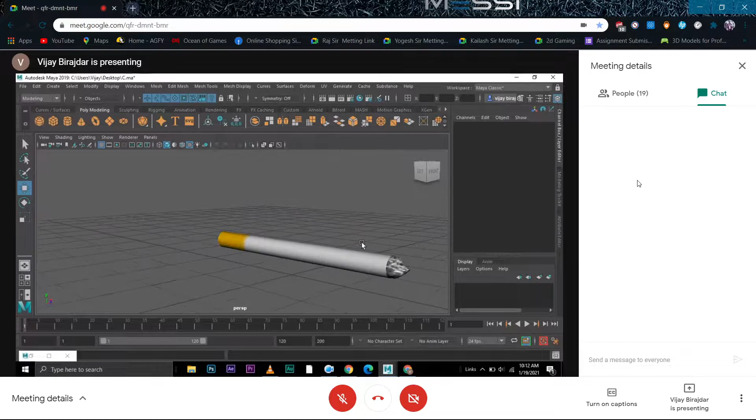In this, Vijay, the filter portion's proportion is looking a little bit too small. It could be a little more.

It's not showing in the viewport. Okay, just do one thing: click on the object and press 6.

Not happening. Vijay, I guess your screen is freezed. It can be my internet problem also, but I think your screen is freezed. Vijay, can you stop it and start once again presenting?

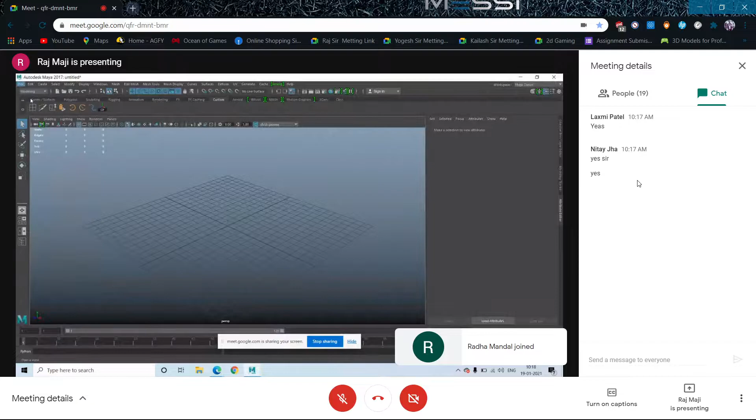First, you should practice unwrapping small models, and then a little bit more complicated models. If you practice so many models like that, you will have the confidence to unwrap anything. So let's open a random model to unwrap and check how to do it. Let's take the hammer we created. I want to unwrap this. So how to unwrap it?

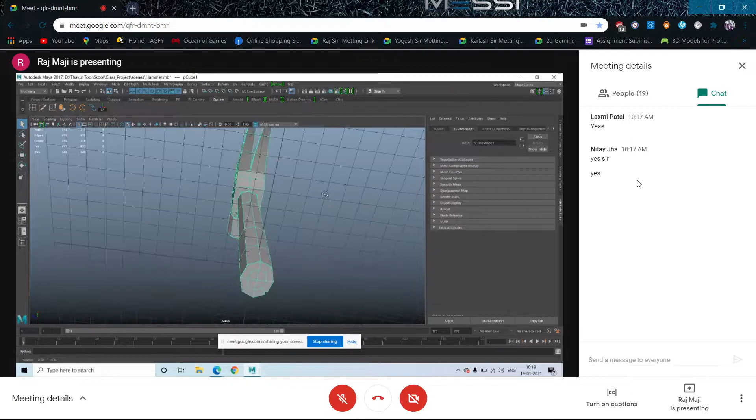Okay guys, so first of all, can anybody guess what to do? Can anybody guess what we can do to unwrap this hammer? What do you think? Any guess, come on guys. How to unwrap it? Any guess? Which mapping are we going to use? So what do you think, how to do it? Just analyze it. No one from the entire batch?

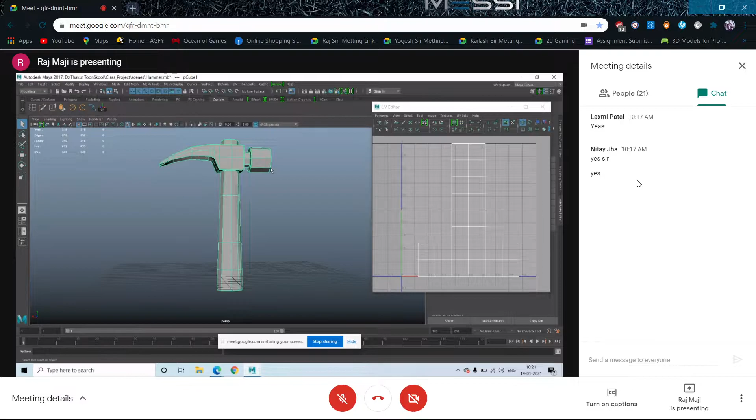Okay, so what I'm going to do at the very beginning is go to the UV editor. And then my intention is to keep the handle separately and keep the metal part separately. So how can we do that?

Basically, two or three different ways are there to do that. One thing we already know: let's select the last loop rather, polygons, and cut UV edge, right? Let's go to display, polygon, and texture border edges. So I have given a cut in that area, you can see.

Secondly, over here also, the last stage I can cut. So cut UV edge. Remember, I'm not cutting the model, I'm cutting only the UVs. So don't be confused in that.

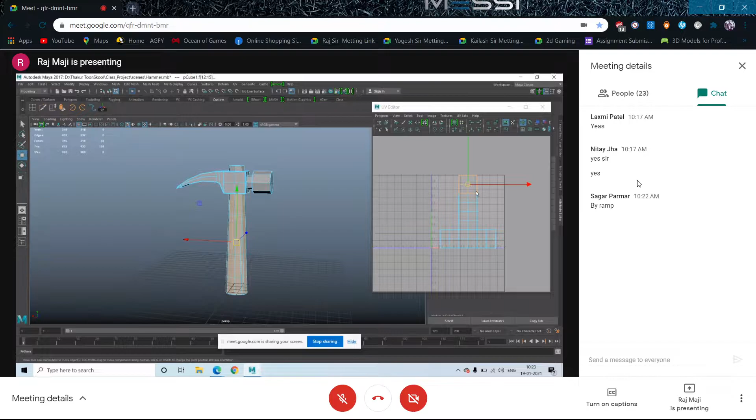Now let's check the UV shell. I'm going to select - so this is the entire bottom part. I think this is the easiest way to do this. And what can be the top part? So this is the top part. So the entire handle, we have separated the UVs. Tell me guys, did you understand this?

You understood this? What I have done, how to separate it, you got it? Yes.

So now, definitely, the rest of the part will be this part, isn't it? Now, in this also, I can see this is a cylinder, this is a cube. So these are all different objects. Modeling was very simple, but while doing the unwrapping, we need to think a lot for this. So what I'm doing, similarly, let's separate this cylinder.

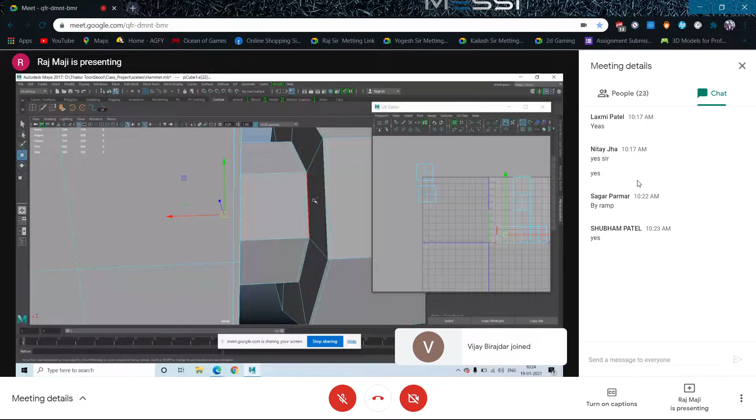Selecting both polygons, cut UV edge and UV shell. Let's keep this one separate. Now similarly, this is another cylinder, keeping it separate. So while dealing with a complicated object, you should deal like this: convert it into small pieces of primitives. Then there will be no problem.

And this is the rest, this is another part. Okay, so I have divided it like this. The handle, one cylinder over here I can see, another cylinder over here I can see, and the metal part. Now, one by one, let's do the unwrapping. First you have to analyze like this, one by one you need to analyze.

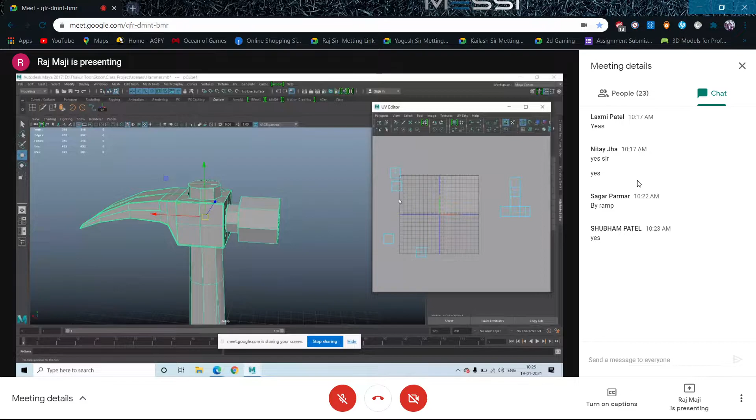So at the very beginning, let's select the handle. Just imagine you are having only this and you are going to unwrap this. So how are you going to do the unwrapping for this? Definitely this is a cylinder. So in a cylinder, what we have seen, the side we have to do cylindrical mapping, and the top and bottom we have to do planar mapping, isn't it? Can you remember that?

So for this, what I'm going to do: let's select the last stage, circular edge, and cut UV edge, selecting the UV shell and keep it out. Can you see? First I divided into primitives. Now, in that primitive, I am dividing into smaller shapes. How to do it? Over here also,

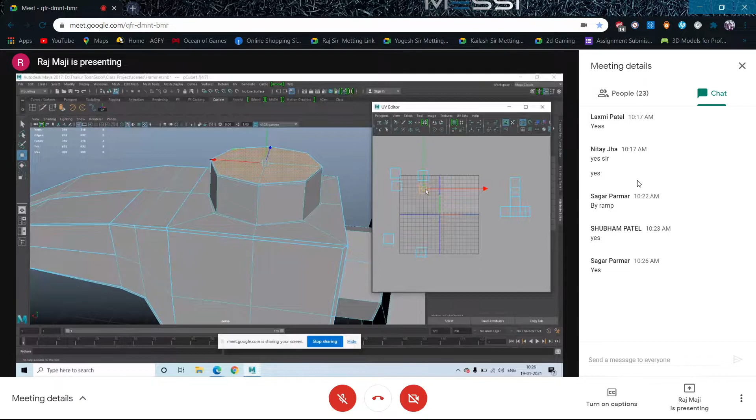selecting the loop, cut UV edge, and definitely this is also going to be another part of it. And now this portion is only the side faces, and you can see how much distorted it is, how much distortion has been. It has been converted into some lines. Can you see some lines? So this object cannot be some lines, so much distortion is there.

So all the faces are selected. This is all right. Now you guys will tell me what kind of mapping should I use for this. Tell me. Yes, cylindrical mapping, correct.

Keep this classroom very interactive. Okay, so I'm asking questions, you also ask me questions, and whatever question I'm asking, answer. Then it will be interesting for you also, for me also. Otherwise it's very boring.

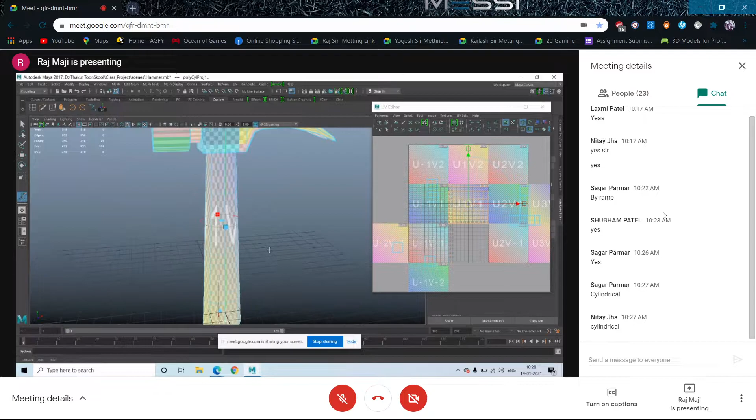Okay, so the side faces are selected. Now going to UV and cylindrical mapping. Now let's say it's better, much better, isn't it? So we have to do something, the scaling is still not correct, right?

So coming to this mapping, and you can see, if you can see properly, can you see this manipulator? Okay, through this you can scale it actually. So from the viewport also, last day I showed how to do it from the viewport, and from here also you can do it. So in this case, from here it will be easier for us.

Let us check which side it is happening. So I'm doing the opposite side. Okay, so I'm keeping it like this, but from this side let's make it a little bit smaller. Okay, so getting better checker boxes. So this UV alignment is fine to us. Okay, workable this is. Now what about these two?

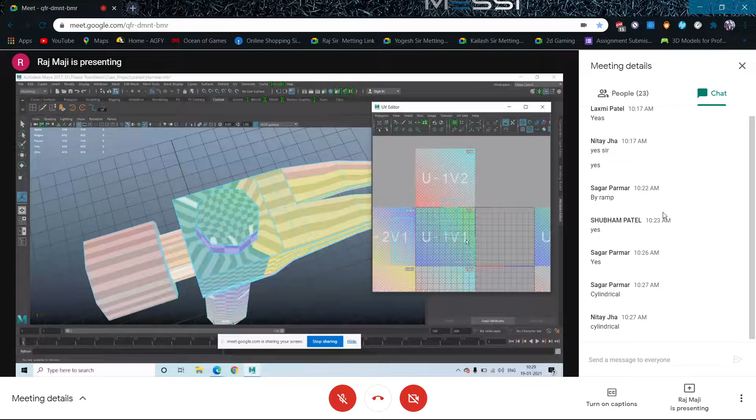You can see the distortion, right? So now selecting these two, the top and bottom. You people will tell me what kind of mapping should I use for this. Exactly, planar mapping, because those two are planes, right?

So going to UV, going to planar mapping, and the camera projection is selected. Now this time I'm going to the top view because I'm going to project from the top, right? And project. So now let's check. Approximately fine, isn't it? I think a little.

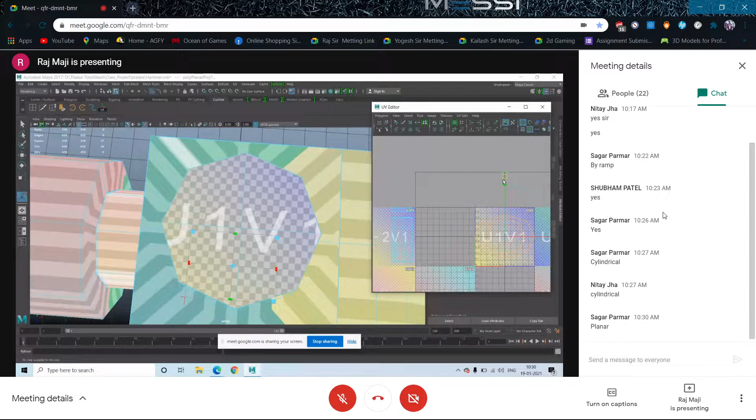It is fine. Now what about this one? This is also looking fine. Only the problem is in scaling. So let us check the scaling.

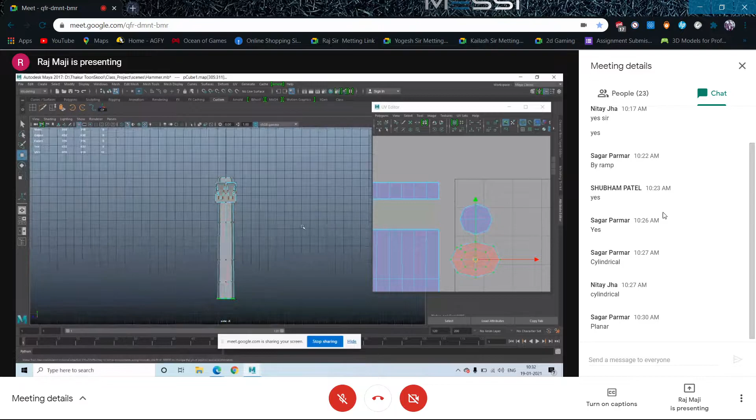Yes, that will matter definitely. So for this plane and this plane, try to understand which side it is facing. It is facing towards the top, no? This particular plane. So if I project this plane from the side or front, I will get a line. But if I project it from the top, I can get a circle.

I guess now you are getting the point, right? Yes. But you know, for the bottom plane, I projected from the top, so definitely it is inverted. So for this, what should I do? I should flip it, isn't it? This is becoming red, meaning it is flipped. So I'll just flip it.

And while flipping, remember one thing: don't select the edges and flip it, then all the faces will be separated. So always select UVs and then flip it.

Okay, so now this handle is perfect, the UVs are perfect. No need to connect anywhere, but if you want to connect, you can. I can show you how to connect, if you want to keep the UVs together that also can be done. So just select any one of it, only one, and move to see.

Only one, not more than one, remember, otherwise distortion will come. And for the top also, the same thing: any one, move and see. Like this, it can be connected.

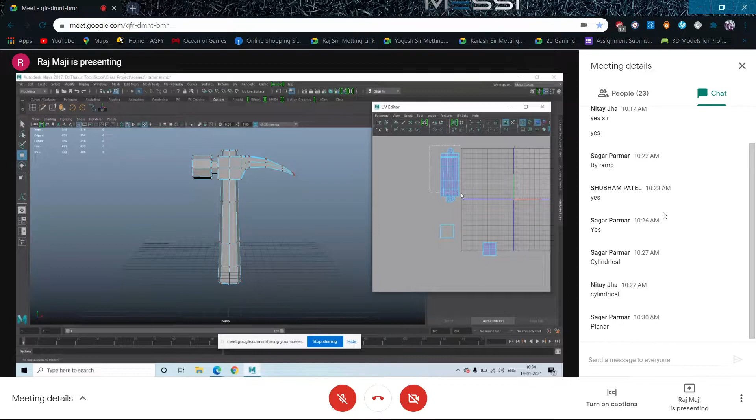If you reduce the number of UV shells, so this is entirely the handle, and you can see it is done very nicely, and there is no problem, no distortion, nothing. It's absolutely fine.

Okay, now let's come to this particular area, let's check.

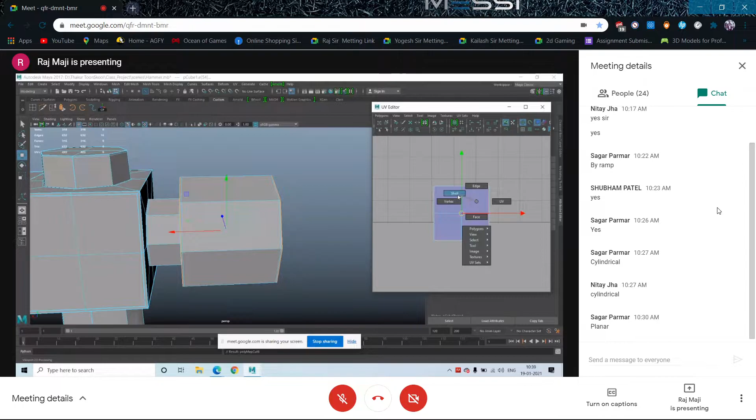So let's go to polygon and cut UV edge. Select the UV shell and keep it aside. You can see I'm keeping it aside, and select this UV shell also and let's keep it aside. And this UV shell is actually the cylinder. Now here guys need to learn something.

Guys, you understood the mismatch? All of you guys understood the mismatch? The orientation of the object and the orientation of the projection is different. You understood it or not?

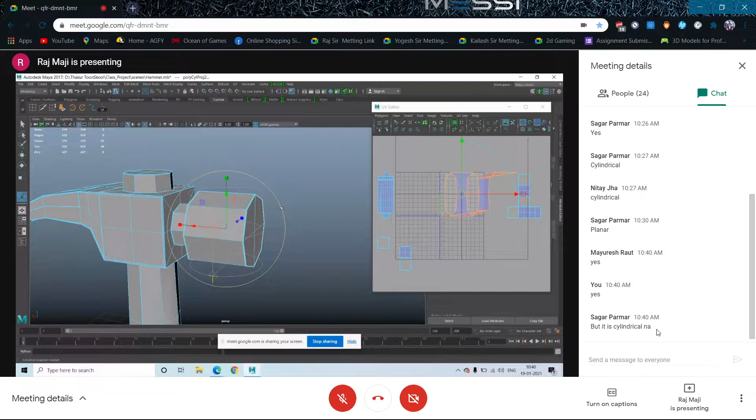Right, yes, so I also should rotate our projection. So what I'm going to do, can you see a small plus mark over here? I'm just clicking on it and I will get the manipulator of the rotation. So this rotation has to be 90 degrees. So you can rotate it approximately, or over here, just check where it is changing. Over here, it should be 90.

And you can see you are getting a perfect square shape, sorry, rectangular shape. Now over here, definitely the scaling is not correct. So orientation is correct now, but scaling is not correct. So what I'm going to do...

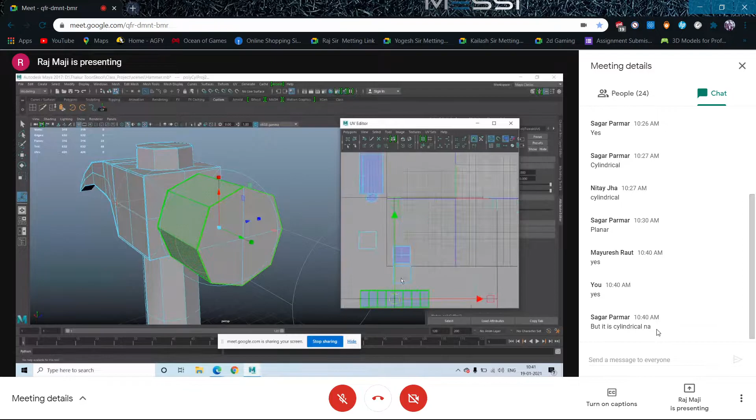In this case also, by selecting these two, how I did it last time, that could be done. But this time I am using this manipulator. Now it is all right. Okay, so this is done, and I'll just keep it aside. And I think these two are bottom planes, right?

These two, okay. Now in this case, let's go to the side view. Why side view? Because my planes are of this side. Okay, so go to UV and once again the same thing, planar projection. Sorry, planar projection, you can see I have done it.

Click over here and okay, this is done. Only one thing, I'm selecting the UVs and let's scale it properly. So definitely if I reduce it over there, the scaling will come correct. Okay, and I'm keeping it over here.

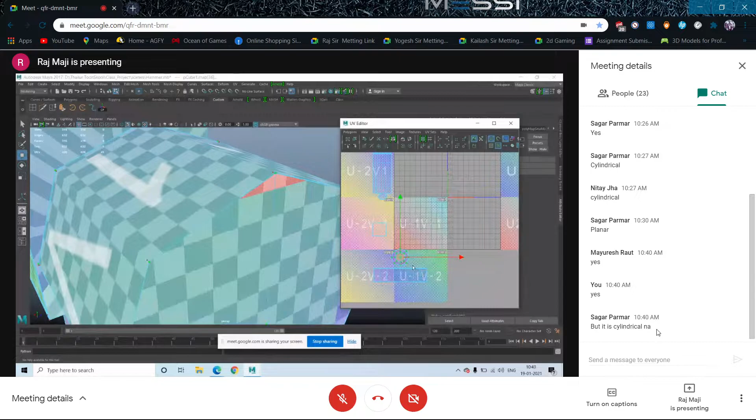All right, now in this case also, two planes are there definitely. So going to the UV shell, select one, put aside, and this one because I projected from this side in this case, right? So this one basically you can see it is flipped. So what should I do? I'm selecting the UVs of the entire UV shell and flip. This is also done. Okay, so the entire part is also done.

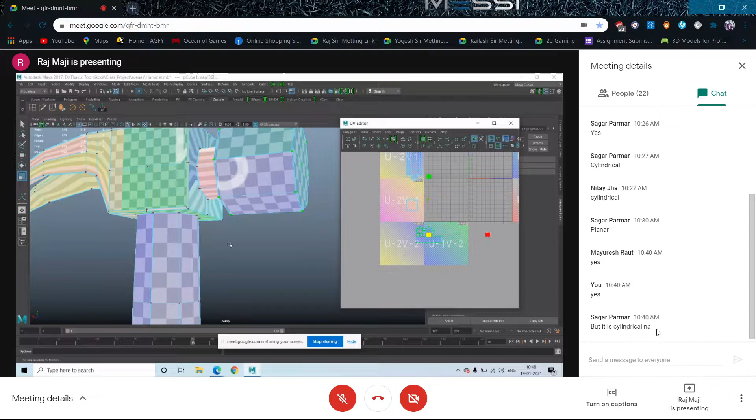Yes, yes, in 2019, in layout, if you are doing it, it will automatically come. But once again, just to remind you, most of the things at the very beginning, when you are a student, definitely you are going to use layout. But before that, try to match it manually. It is a good practice. Understood? So how I am matching manually, try to match it before using the layout. In 2019, yes, automatically it will be done. But in some cases, in my experience, the layout is not a 100% perfect tool.

Okay, so I have seen so many cases. Recently, I was modeling something and I was unwrapping also the same object, and it didn't work. Layout didn't work. Most of the cases, 90% cases, it worked. But this particular case, it didn't work. So I needed to work manually. That is the reason I'm telling.

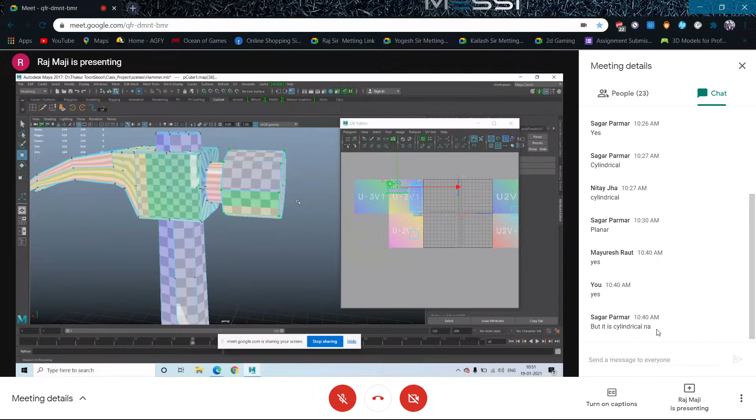So, selecting the face - now this side, this one, this is also a cylinder, right? So once again, going to UV and cylindrical mapping, and you can see here also this is looking problematic, right? The same problem - our cylinder orientation is like this, and the UV projection is like this. So what should I do? Just selecting this, and I need to rotate it, and it's becoming clean. So let's make it 90 degrees, and it is fine now.

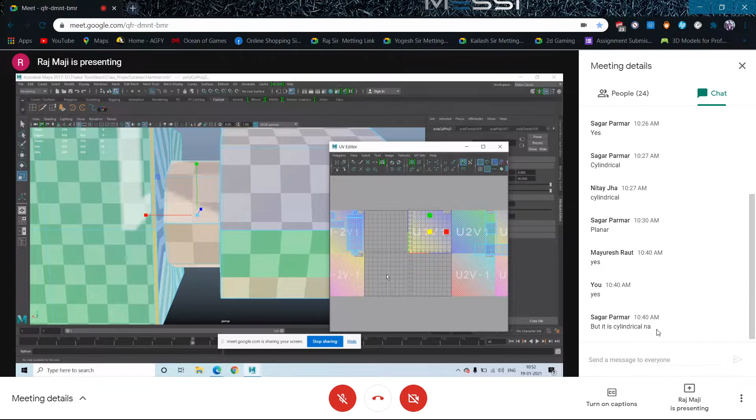Okay, now it is looking fine, but checker boxes, right? Scaling is not clean. All right, so this is also fine, just keeping it aside. So now my UVs are looking like this - these are all unwrapped, so all are unwrapped, and this is not unwrapped.

So now for this area also, first of all, this area is really complicated. So we don't know how to do it. So for this area also, it's better to divide the object into different parts, I feel. So for this, what I'm thinking, if I can select from here - let's check if it is connected. Yes, it is connected.

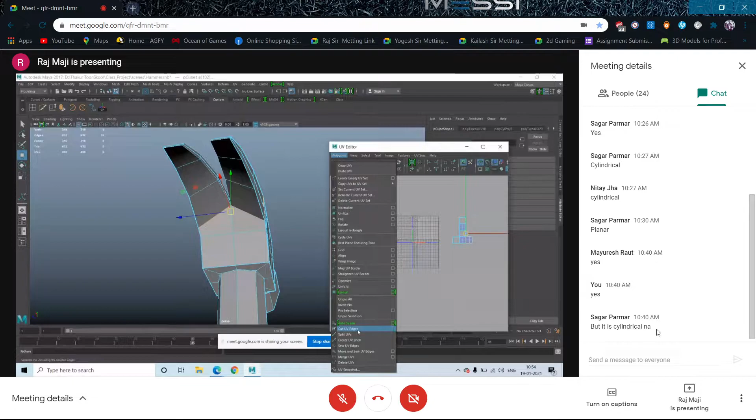Okay, let us use cut UVs, going to the UV shell. For these things, these are very common objects to me, okay, I know the result basically. Before doing it, I can imagine the UV shells just by looking at the object. But this, entirely I cannot imagine, so this is once again a kind of new shape to me. Just try to understand how I am analyzing the object, then it will be a little bit easier for you. Here I can see a problem that when I am going to select the UV shell, I can see there are several UV shells and very small UV shells. I don't want that.

First of all, let's convert it into one UV shell. How can you do that? By selecting all the faces and doing a planar mapping. Randomly planar mapping, doesn't matter how it looks. Randomly, so that when you select the UV shell, it is converted into one UV shell.

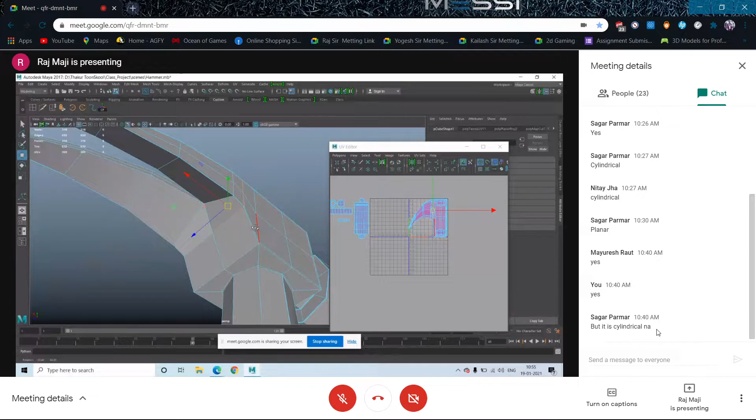This is what I wanted for now. Okay, now just double click on it. What I was doing basically...

I selected this, I guess I selected this, right? I feel so, I selected this. Yes, okay. And then polygons and cut UV edges.

Now select the shell, and this is nice. I have deselected these two. Now I can concentrate only on this, right? So what is this? This is just a cube, isn't it? This is just a cube. This part is a little bit extended.

So what kind of mapping should I use for this? Tell me. You guys tell me, what kind of mapping should I use for this? That is just a cube.

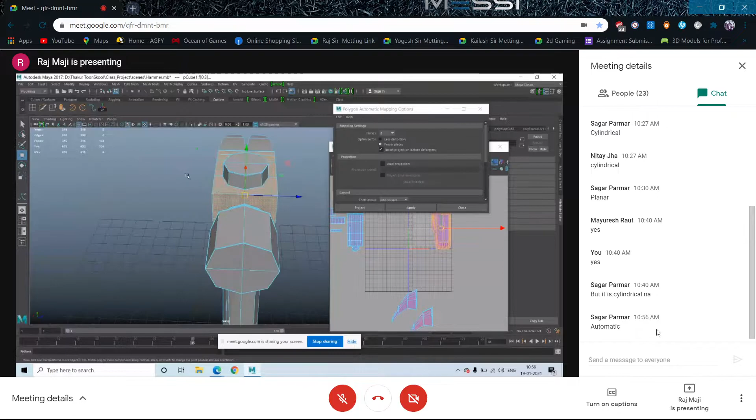Definitely automatic mapping. Why so? Try to understand the reason. When you analyze it, I'm going to the automatic mapping option box. So a cube has 1, 2, 3, 4, 5, and 6 sides, and it will also project from the 6 sides. It can be from 5 sides, 3 sides, 4 sides, 8 sides, but by default it is 6 sides, right? So let's project and try to understand what's happening.

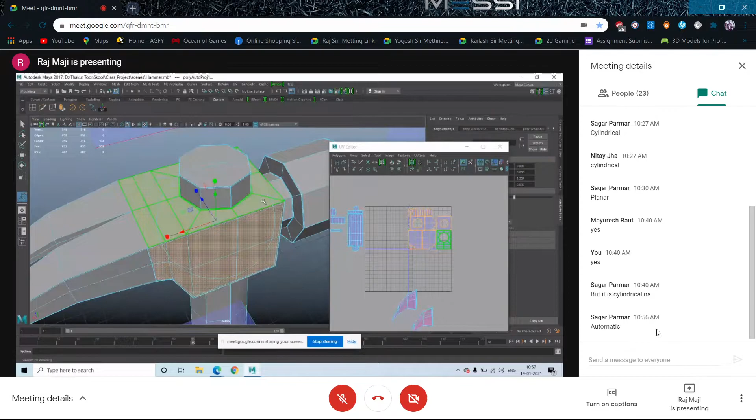Okay, it's projected nicely, but in some parts it has created several objects. Okay, I understood the parts. It is giving problems, and for that, let's isolate it.

Okay, so first of all, can you see the inside part? The inside part is also a cylinder, isn't it? And over here, the inside part is also a cylinder. So I just ignored it, but that is also a cylinder. So we need to treat that separately. Okay, so for now, I didn't do anything for that.

Anyway, so this is the UV alignment. So selecting the UV shell, maybe this one, and from here to there, I'm just selecting. You can see all are perfect. All are perfect, right? This is a simple cubic shape.

That is the reason. And what can be done in this case? So I'm selecting these edges, and you know what, this can be connected over here, right? So move and see. Okay, so there is no seam right now over here in this area.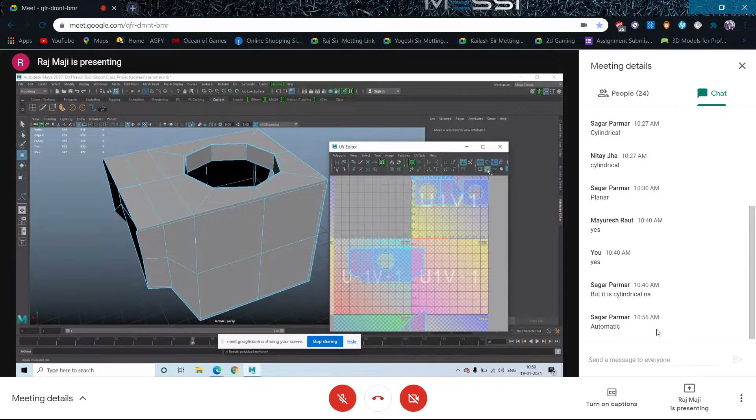Now, similarly, I'm selecting this part, move and see. It also has connected. Our checker boxes are clean and there is no seam, right?

Similarly, the bottom part also I need to connect either this side or this side, not both sides, any one side. So let's select maybe this and this, and let's see. Okay, it also has come. That's fine. Now this side. So any one side we can concentrate, either this side or that side, right?

Any one side we can concentrate. So let's select this side over here. So once you... and in front, this. So this I connected. So over here, this I am connecting. So let us check over here. You can see...

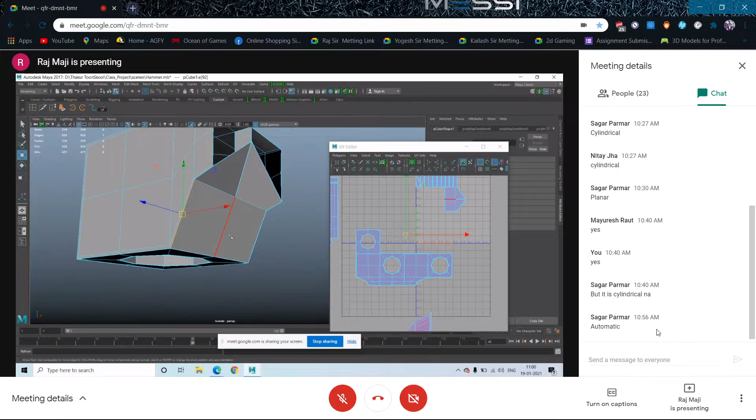And there is a possibility it will be a little bit distorted. So instead of two, I am selecting only one in this case. Or you can select this also, then there will be no problem. So this I am selecting. Yes, it is a better condition. Yes, so there is no distortion.

So if I try to connect these two over here, then there can be a distortion. These two, and this small one - this is a straight line, but here it is not a straight line. So there will be a problem. So now let's check if everything is perfect. And you can see everything is looking perfect. There is no problem, there is no problem.

And I have converted this into one UV shell like this. Okay, so this portion is done. I'll check the scaling later on because the scaling is not correct.

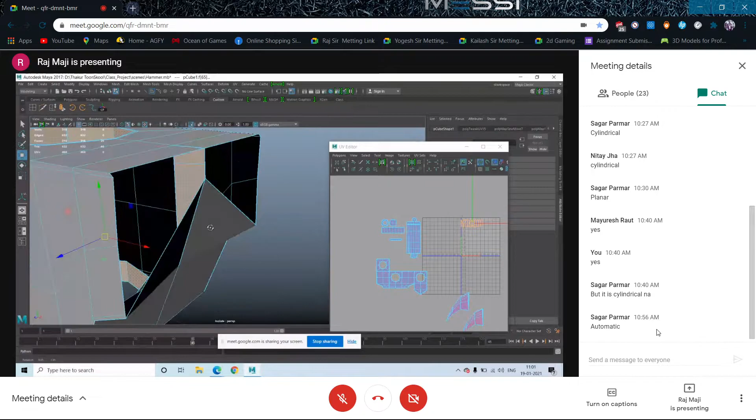Now this, and this cylinder, two cylinders. So what I'm going to do is select all the faces. Okay, there is another part of it, there is another part of it inside this one. Okay, so before dealing with those two...

Let's separate this, and I will check if this can be connected together. Yes, you can see this can be connected from the center line. So let's see. Okay, and if this can be connected with anything - okay, this is the area, so this cannot be connected with anything. So this is the area. You can see you cannot connect over here, right? So problematic. Definitely this area I have to keep separate. So let's keep it over here only.

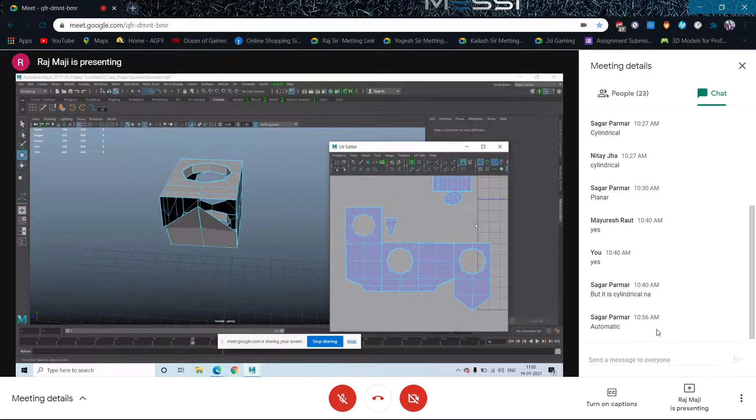Not a problem. Now going to the cylindrical shapes. So selecting all the faces in this area, and I am using a cylindrical mapping. Alright, let us check. It's fine. Scaling is not correct, so let's do it from here. Okay, now it is fine. Let's check the scaling a little bit. Should be smaller, isn't it? Trying to match the checker boxes basically.

I guess it is all right.

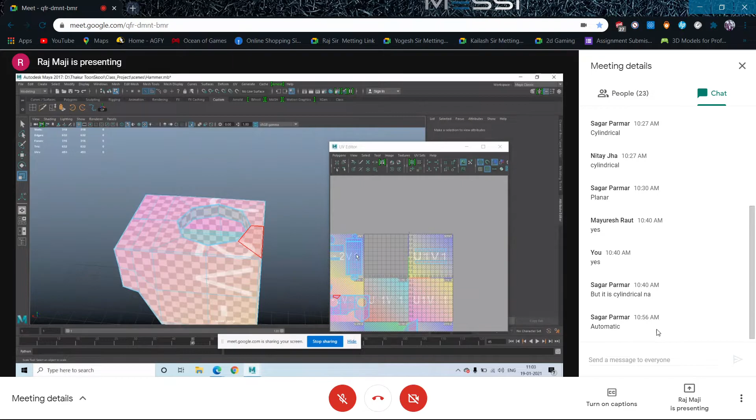Yes, it is fine. The cylindrical shapes are also done, but the problem is the faces are inside and projecting from outside the cylindrical shape. So what should I do? Selecting both, just flip it. Until it becomes blue like this, it is not correct. Selecting these two and keeping it somewhere over here.

Now let's go back. Check the scaling. You can see the scaling is mismatching, right? So selecting all the UVs over here, and something else is also selected. Yes, let's make it smaller. Okay, now the scaling is correct.

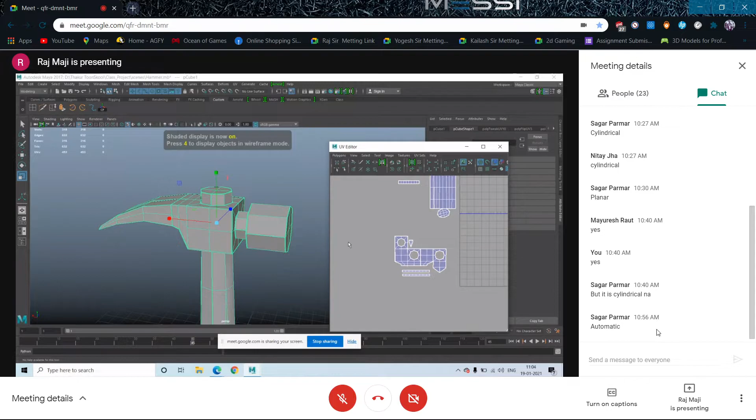If you think properly, I took less time in modeling this hammer, isn't it? But UV unwrapping is taking so much time. Some models it will be like this only, and some models UV unwrapping will be very quick but modeling will take much more time, like a human head.

So now these two things are remaining, this and this. So for this, what kind of mapping should I use? Just check the shape, guys. Tell me, what kind of mapping should I use? Any guess? Any guess?

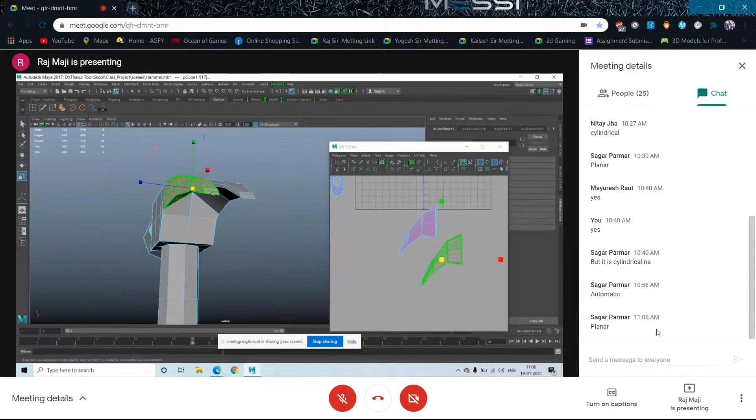Planar. How come it will be planar? Just analyze it. It is not a single plane, no? It is having one, two, three, four, a small one, five planes. So then what can be done? It is having five planes.

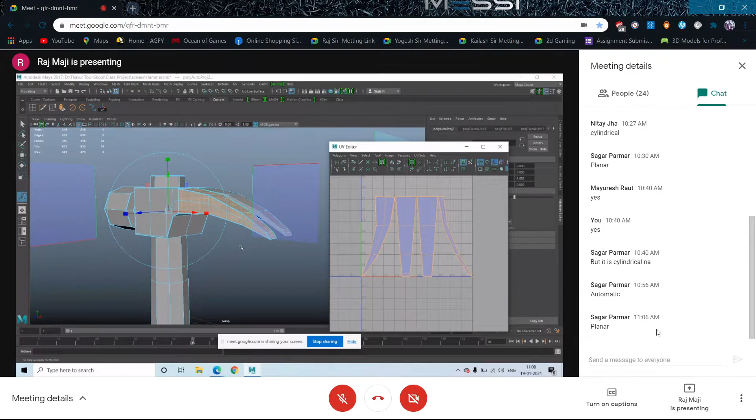Okay, so automatic mapping. So Sagar, what you were saying, don't you think that after doing planar mapping of individual sides we'll get something like this only? Yes sir. So this is looking fine to me.

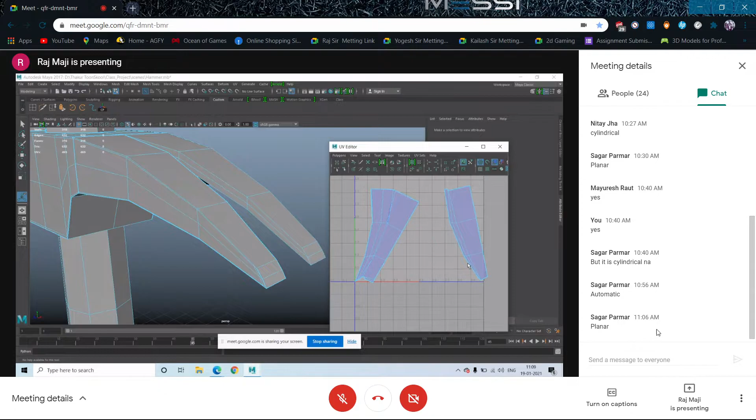All right, move and sew. Let's keep it like this only. Okay, over here let's do it in some other way. I wanted to connect like this. Move and sew, and then move and sew. Selecting entirely.

Okay, now you can see the problem is in some areas there's distortion. It's not visible actually, but I know distortion is there. So anyway, we need to compromise a little bit for this area, otherwise we need to keep it separate. I can see overlapping in this area. So what my job will be, just select small area.

Going to unfold and legacy. Apply and close, you can see it's getting better. Selecting G, selecting G. This area is all right almost. This area G, small areas. Okay, where you think there is a problem, I can see overlapping in this area. So G, and it's getting better, you can see.

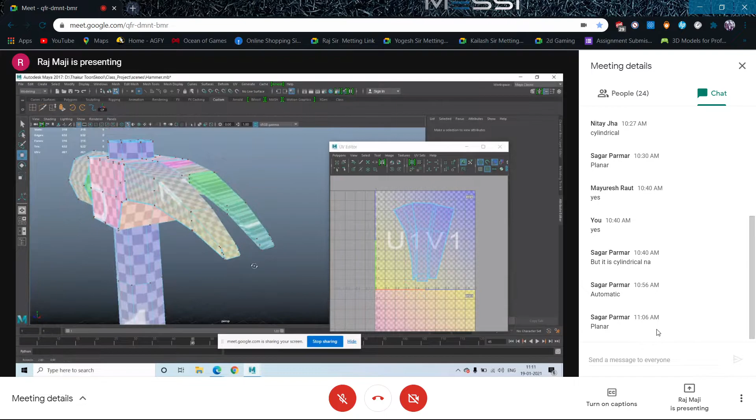So this area is already unwrapped, so this area... okay, now let's check. All right, so I will keep it like this only. So we'll keep it aside. I'm not scaling it right now because after doing this I'll do the scaling of that.

So selecting the faces in the very same way, and automatic mapping. Similar kind of UV shells we have got. So just select these three, move and sew. Select these three, move and sew. Now select these three, move and sew. Okay, in this case also you can see overlapping over here.

So unfold over here, unfold. I'm pressing G, unfold. The areas you feel like there's a problem, just unfold it. So the end tip of it is unfolded properly. So just take the areas you feel could be better.

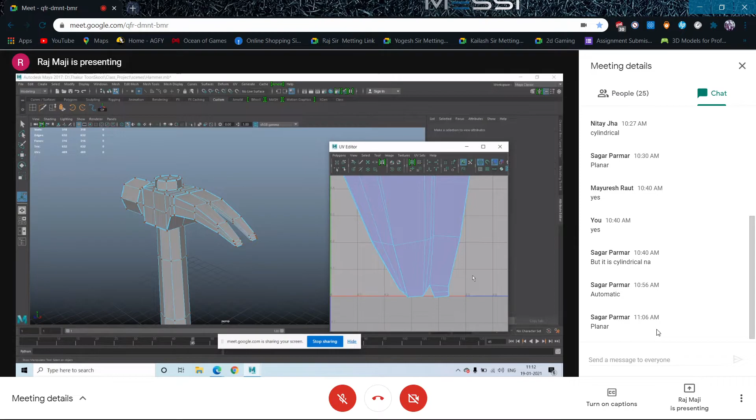Okay, let us check the UVs. Almost fine. Problems are there. This kind of object is a little bit out of linear shape, so little distortion will be there. That is human error, cannot help. But we are converting into one UV shell. If separate UV shells, definitely that will be perfect, but in that we need to compromise to make it one.

And now let's do the scaling.

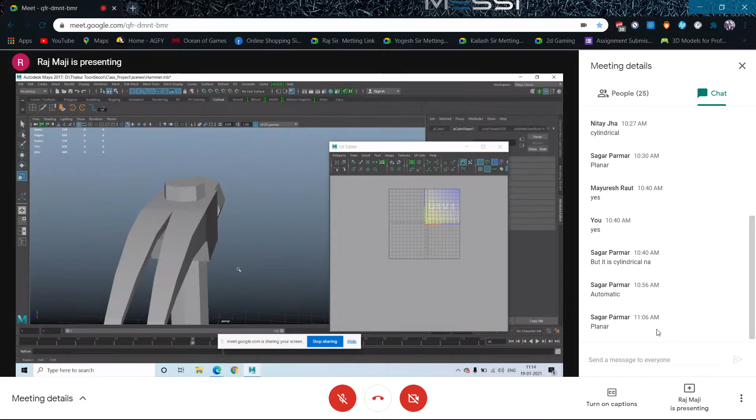As I told you last day, we are having something called triplanar projection. So in that there will be no problem, to be very honest. How many UV shells you are keeping doesn't matter at all.

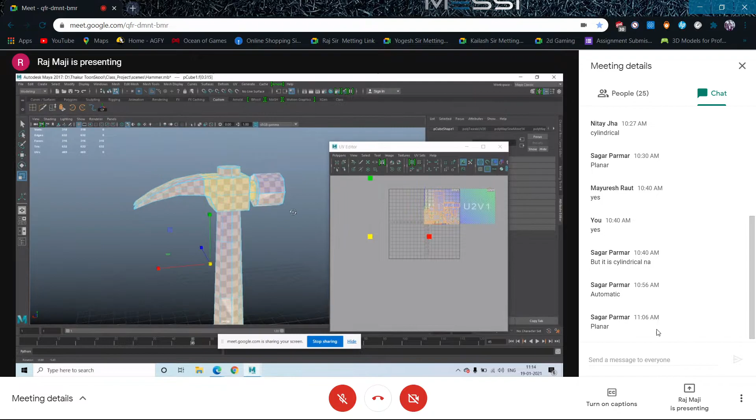Okay. So now we are having, you can see so many UV shells and all the scaling is correct. Individual parts are correct. So selecting all, and this is the layout option. Layout UVs. So selecting it, and you can see the entire hammer is unwrapped and now it is ready for texturing. Each and every corner is ready for texturing.

Okay, but you can see we are wasting some of the areas in this, so that's not accepted. Scale it up a little bit. This is what I was telling you, we should not be dependent on that layout button.

Okay, I can see it could be better. So selecting the UV shell, let's rotate it in this area and let's keep it. I'm just trying to use it perfectly.

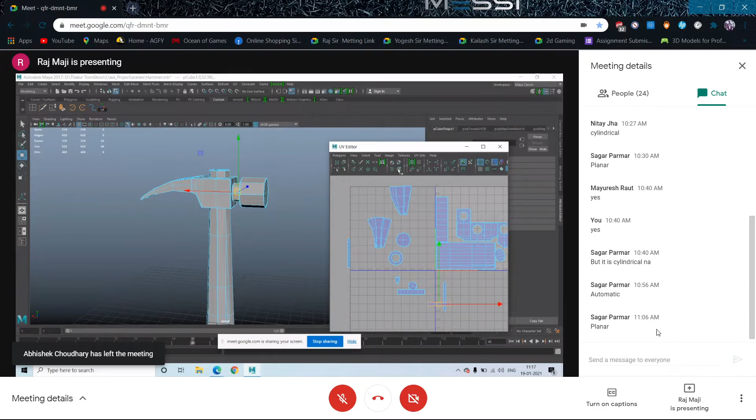See how I'm trying to place it. Don't overlap anything, okay? While placing, don't overlap anything. I can see there might be, no, there is no overlap. All right, see how nicely distributed. And this one.

It is like a puzzle. It is like a puzzle. Or maybe I will just change the position of it. Maybe over here. Yes, this is the correct position.

Perfect. Now these two, let us check. Perfectly kept. See how bigger I made it, but still I am able to arrange it properly. And this is what I was telling. Still I am able to do this.

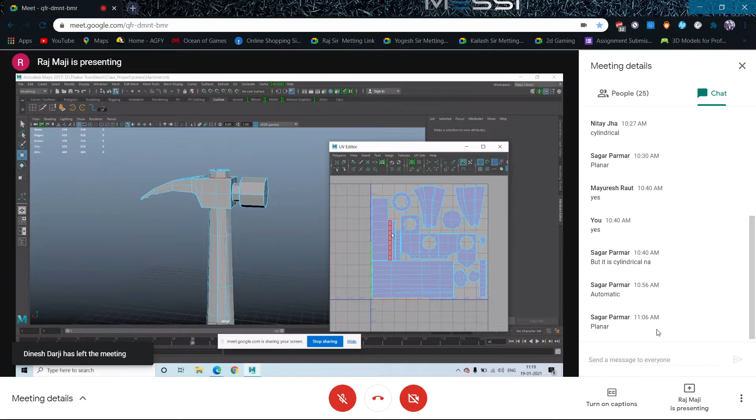So this will be the unwrapping. So now my model is ready. Remember one thing, after doing the unwrapping, if you go to channel box, can you see you have created so many input history for this object. So the object is very heavy now, though it's a very simplified object, but the object is very heavy. So what we should do: just select the object, go to Edit, Delete by Type, History. Now what will happen? There is no history. The object once again becomes light.

Okay, now one best practice, let me tell you, because after some days you are going to start your 3D project. So what is a good practice in each and every modeling, after doing the modeling and unwrapping it, when the unwrapping is ready, what you have to do? Go to File, Export Selection. Go to the option box of it, and instead of Maya binary, select OBJ export. OBJ export, and just export it. So just write down hammer, and OBJ means object.

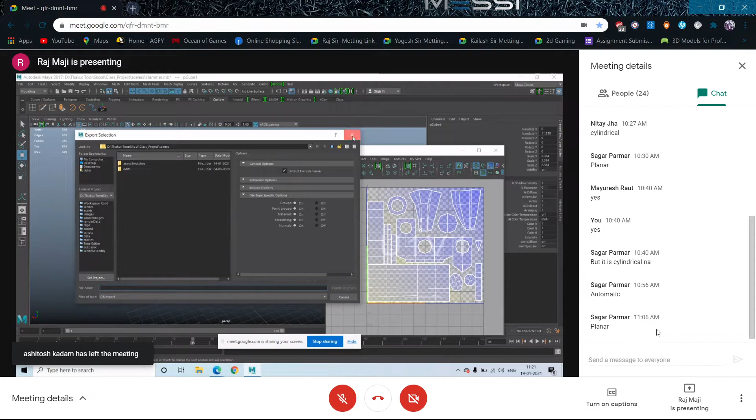Remember this. If you have made a model very nicely, this is a good practice. After doing this, generally the model will not corrupt, but it can corrupt in the Maya file. So you will see all the UVs are jumbled up. This happens, I have personally experienced it so many times. So that will not happen if you have exported in OBJ.

Suppose you have textured this particular object, so you have the texture map, and the texture map is there in your source images folder. If the UVs are intact, then only your texture will work. Otherwise your texture is not going to work because the placement will change later on. You cannot create the same thing once again. Do you think you will be able to make it once again?

I cannot make it once again. When I unwrap this object a second time, maybe I will attach this somewhere else, maybe over here on this edge. But I cannot create exactly the same thing. That's where the problem is.

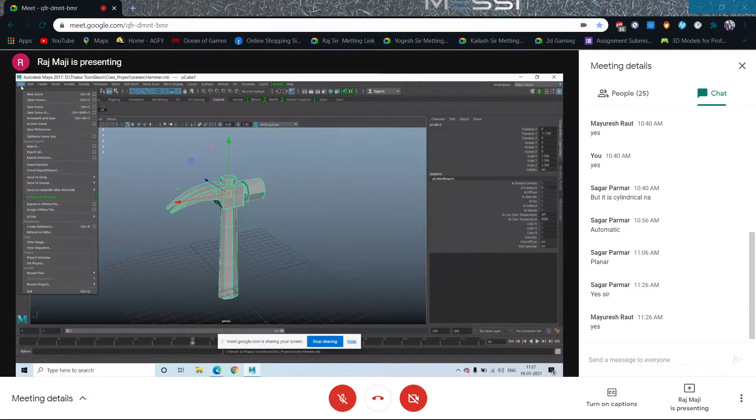Now this time, let's take another object, and this time a little more complicated - whatever we have modeled in the classroom. Let me check how the model was. Okay, yes, the tree we have made.

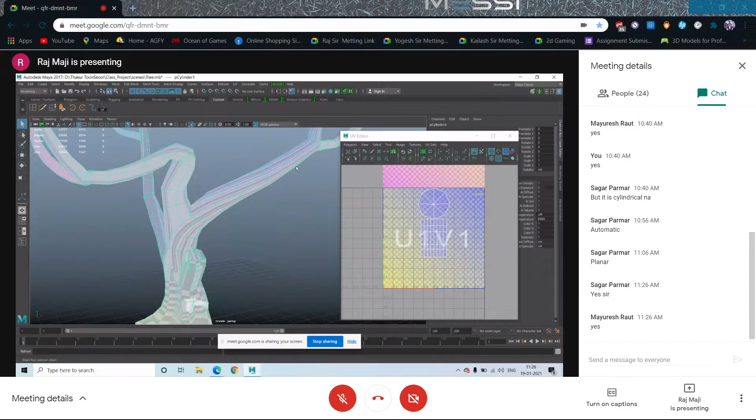Suppose you want to unwrap this, then what? Very complicated object, isn't it? Can anybody guess what we can do for this object? See how it is showing the UVs like this, and how much distortion it is having - very, very problematic.

And the UVs are showing like this - cannot be, never. Okay, anybody can guess? Break into small cylinders. That's a good idea, yes, can be done.

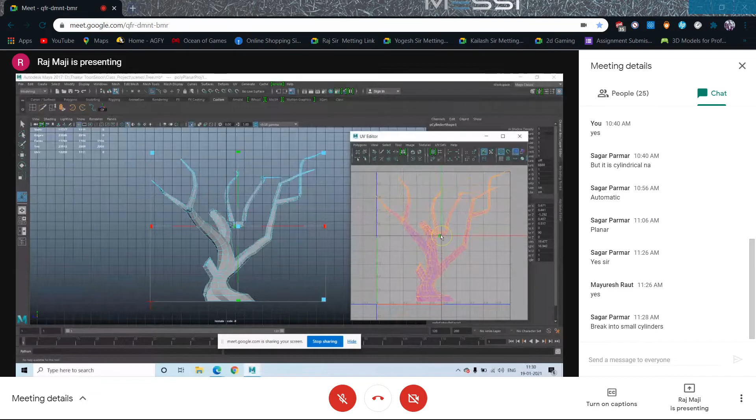So first of all, just going to the front view, or side view - this view is better. And let's do a planar mapping. Why do a planar mapping? To convert the entire object into one UV shell. Okay, now you can see it is one UV shell. This is what I wanted. All right.

Now, yes, what Sagar is suggesting - let's divide the parts into smaller pieces. Can be done. So what I'm going to do: display polygon texture border edges. Very important, okay, before doing anything, otherwise you will not be able to see the borders. Selecting this part and cut UV edge, keeping the UV shell aside.

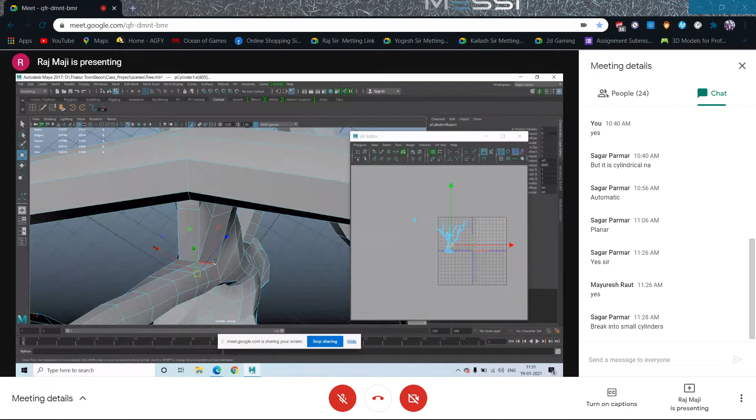Now, definitely this entire part is totally different. So, cut UV edge, keeping it separate. So these two are separate. Now, in this, let's keep it intact with this and let's separate this part.

So this is fine, already a seam is there. Giving it aside, so this is the main branch now. Now in this also - and you see this is a very tedious process, definitely, but at the same time, it is an opportunity for you.

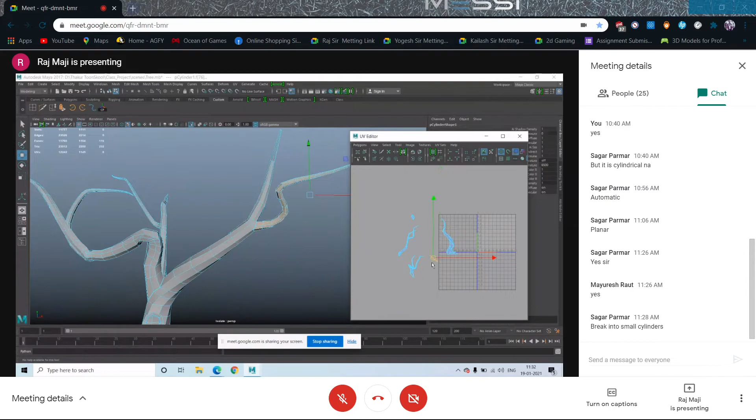It is an opportunity in the sense, if you are working in production and if you are good at it, you can have a job. Like if you are very good in UV unwrapping, you can have a job. Okay, that's fine.

Now, in this also the same thing we have to do, you can see. Separate UV and - sorry - texturing job, right? Yes, texturing part, no, no, no - you can have a separate UV unwrapping job. Meaning in the texturing department, in look development department, there can be separately someone who will be creating textures - that can be a different job.

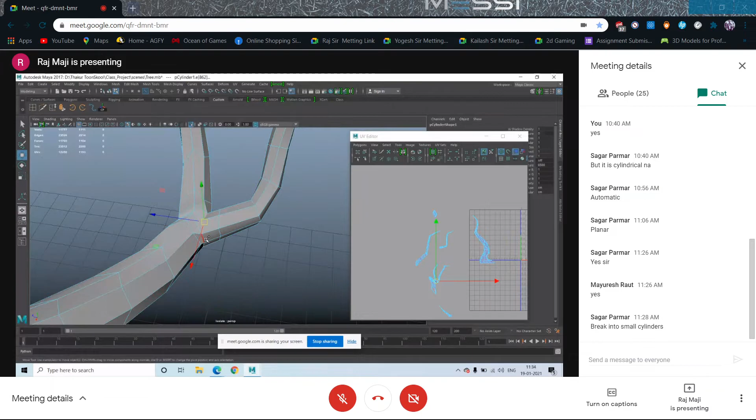Mostly they will be painters who will be creating the textures - they should be able to paint. And at the same time, you can have like a surfacing job who will create the material, will create only the materials. And there can be a UV unwrapping job in the same department actually. You should know all three, but you can be specialized in one. This is one job, the unwrapping job, and another one is the surfacing job. So texturing will be creating the textures, surfacing will be creating the materials, and unwrapping will be unwrapping the models - so it can be separate.

In big productions, definitely these will be separated - surfacing and shading. Shading means you are going to create the material. Suppose there is a gold coin, so you need to create a gold surface material, no? You should know what will be the index of refraction of gold, how much reflectivity will be there, what will be the specular highlight of gold, what should be the color of gold.

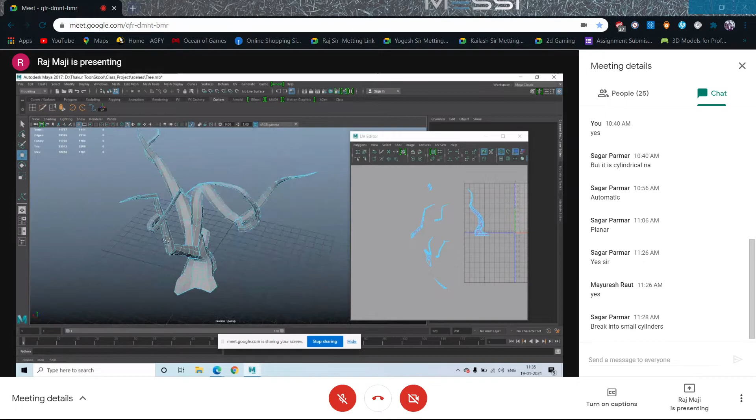So you are specialized in that particular area - creating the material. One person will be specialized in texturing, painting the textures. One person will be specialized doing the unwrapping. And in some productions, if you are a modeling artist, you have to know unwrapping because you have to do the UV unwrapping thing yourself - so in some productions it is a modeler's job.

Anyway guys, now I'm going to show you a shortcut. This much is okay, right? All of you understood - I created different UV shells for each of the branches.

Now doing cylindrical mapping, suppose for this, what can be the manual work? You cut it into three pieces - one, two - so this is one cylinder, this is one cylindrical mapping, this is the third cylindrical mapping, and then move and sew - the entire thing will be converted into one UV shell. I guess you understood what I just described. You need to cut the edges of this and this also, so that this is a different cylinder, this is a different cylinder, and this is a different cylinder. So do a cylindrical mapping thrice - first, second, and this is the third time.

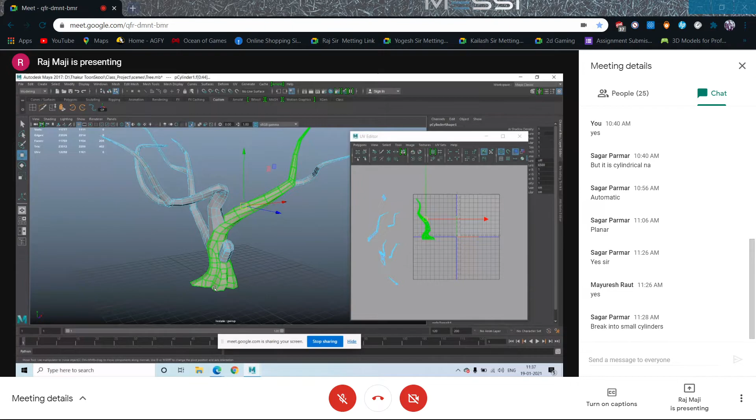Okay, so you got evenly distributed checker boxes - one, two, three UV shells. Now move and sew, so convert it into one UV shell. So that is the manual process of doing it. So in this case, I am showing you a shortcut for this. Okay, so let's check.

All the faces are selected. Going to polygons, and we have one option called unitize. What the unitize will do is convert each face into one UV shell. I guess you can imagine - I'm dealing with 205 faces now. In this, we are having 205 faces, and if I apply unitize, I will get 205 faces over here, and all are separated. Let's check.

All are separate faces over here. You can see, all are separate.

Now my job is I have to move and sew each and every face. So now you can think sir was telling about a shortcut, but actually showing a long cut. Okay, so actually it is a shortcut. Now let's check what can be done.

I'm selecting. This selection is very important, just try to understand guys. Let's select a seam, this one is going towards this one, right? So this one, and let's continue.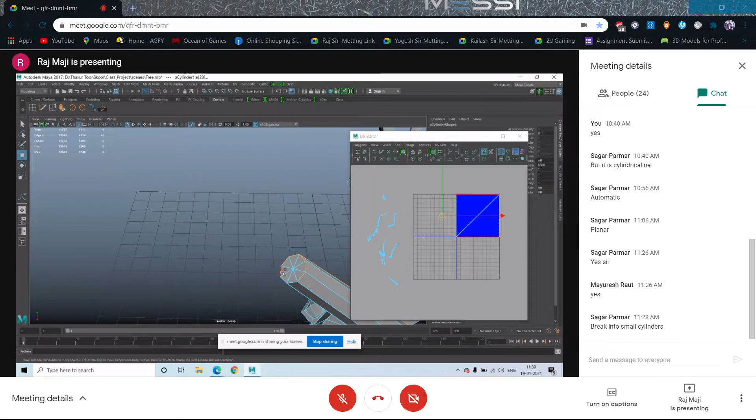So I have decided my seam, this is going to be the seam. Now let us check the end part of it. So I don't want this part to be a seam, but a little bit cut. In these areas only two will be connected. So this will be the seam.

After that, what I'm going to do is I'm holding Shift and toggle select. So what I selected became deselected and the rest became selected. I guess you got the selection even over here, right? So now I am only dealing with this, so I don't want any selection over here.

So holding control and deselecting all this. So only this part is selected, what I was selecting, but the seam I created, that is not selected. Okay, now polygons and move and see.

And you can see the UV shell. It is actually nicely done. And let's make it smaller.

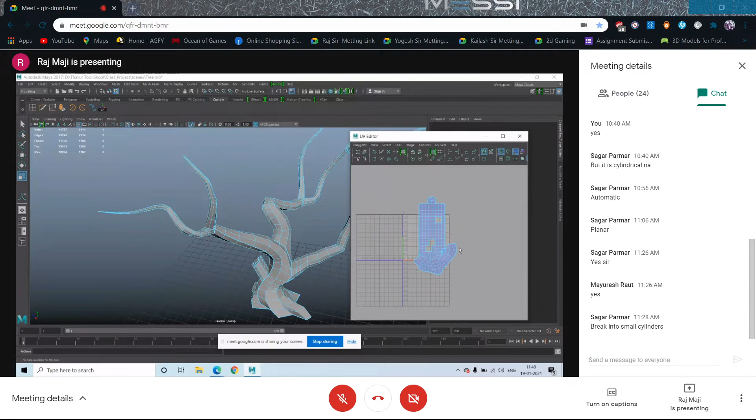Can you repeat the selection part after it? Yes, I'll repeat because I need to do the rest. No, so many times I'll repeat it. Okay, so just try to understand over here.

Now the scaling definitely will not be correct. So you can see the checker boxes. Yes, we are getting checker boxes very close but not 100% correct. I can see this area is so narrow, but over here the width is too much, so it cannot be correct. So yes, it's not correct.

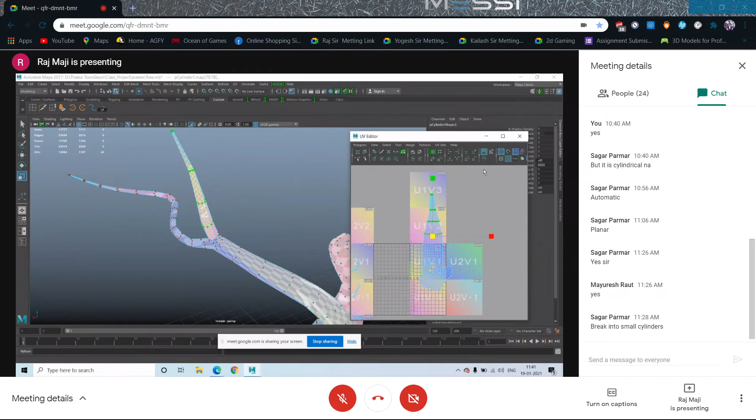So yes, this is a problem. Don't select everything and unfold, then it's gone. Small part of it, okay, small part of it.

Let us check, how is it looking? At the bottom, yes, I can see a mismatch in this area, in this area, right? So for this, we are having something. Let me check.

There used to be some tools. Yeah, this is the unfold tool basically. So what I'm using, this unfold, here we are having the unfold tool. So like this, also you can paint.

So the areas facing, looking problematic, will be fine. So let's select the entire bottom part and take this tool, and you can see it's becoming better.

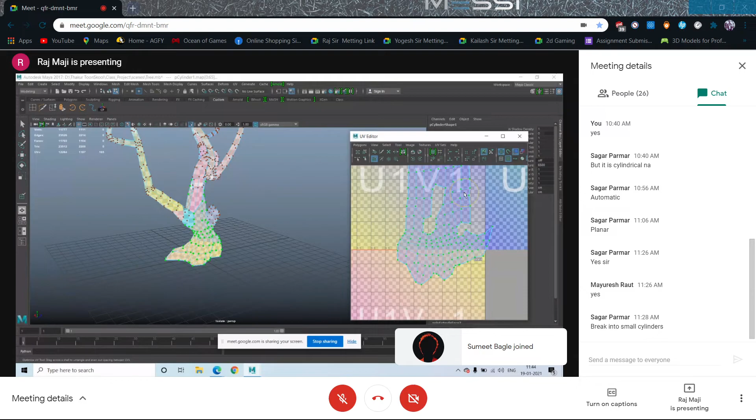So I'm just checking it, and can you see, as an organic model, we are getting a decent result of UVs. Decent result of UVs. Okay, so this is one.

But just imagine guys, if you want to do cylindrical mapping, selecting small areas, then it will be too tedious for us, isn't it? So now this is all right. So I'm keeping one vision like this. Now let's go to the next.

So another, let's take another complicated one. Maybe this is not complicated one. Maybe this one, yes, let's take this one.

Okay, once again, doing the same thing. Just check it carefully, what I'm doing. Selecting everything. Okay, you guys will tell me what to do. I'll do it. I have selected the face.

Then what? Then what? Come on. I just have done before some time. Cannot remember? Yes, unitize. So polygons, unitize.

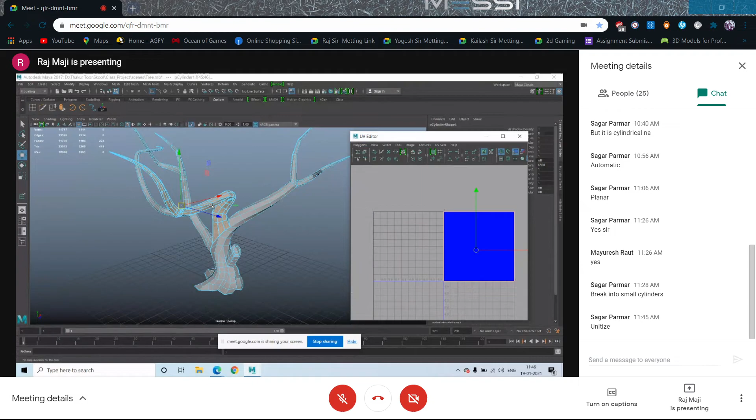So all the faces are converted into separate faces. And then what should I do? I should select a seam out of it, isn't it? So for that, in this case, let's select this part.

Okay, throughout, it has to be throughout. All right.

Then what? Check the selection. You asked how to do it once again, so I'm doing it once again. I selected one seam, then holding shift and drag selecting the rest. So what's happening? That particular part is deselected. So my job is just to deselect it. By holding shift, I'm deselecting it. And then nothing to do with all this, right? So holding control and deselecting all this. So only that much part is selected. Now is it clear, guys?

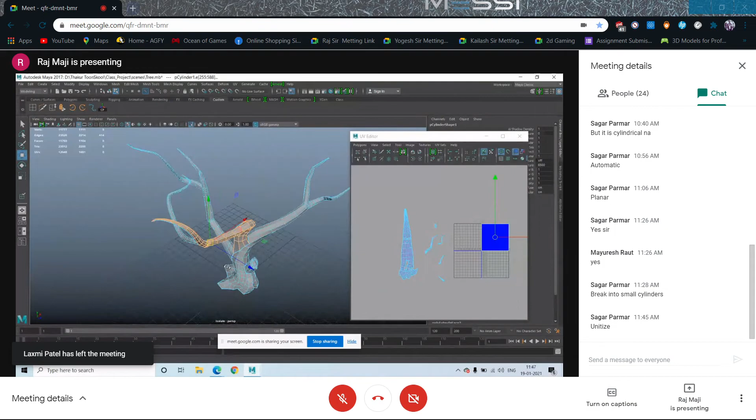I guess now you can understand what's happening. So the next job is polygons. Move and sew.

I can see a problem over here. That is because of this top, I think. Because this time I didn't keep anything over here.

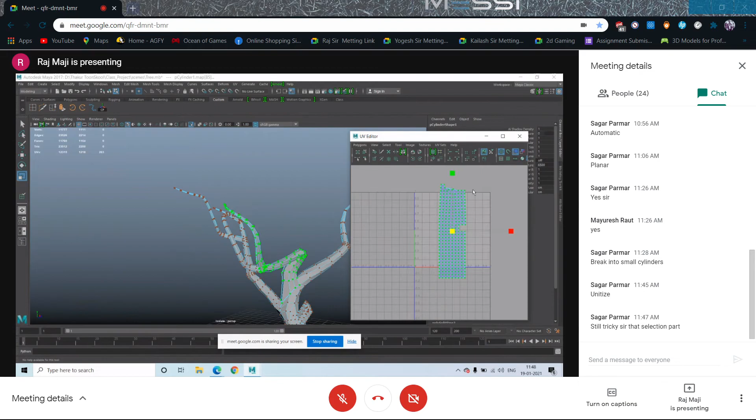Okay, let us check. So, much better now. And this is looking so amazing, the visual, isn't it? If you have experienced the tedious processes of UV unwrapping, after looking at such a clean UV shell, you will feel so happy.

Okay, so let us check. We are getting it, but the scaling is definitely not correct. So once again, small areas, just select the UV and unfold, and get the shape of this. Work in small areas until that area is correct enough; don't move forward. Correct, right? This area. All right.

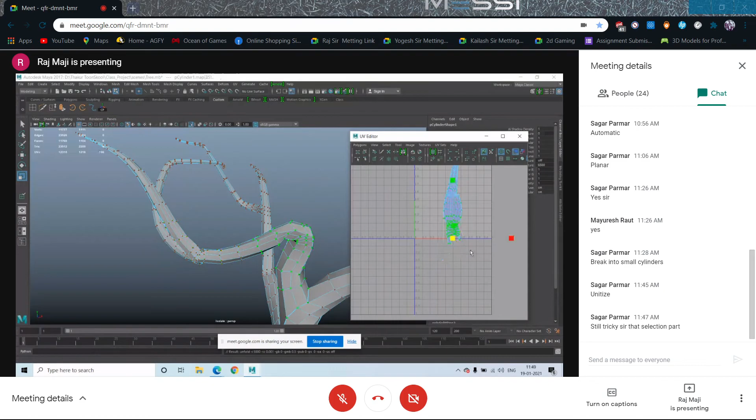This is a mistake, okay, what I just did. Over here, bigger boxes are already correct. So if I am unfolding this, its scaling is mismatching now. So this scaling is already correct. I should not do that. Avoid selecting the last stage.

So if after unfolding you still feel like unfolding some of these areas, you can just come to the unfold UV tool also and just unfold it. But you have to remember how much area is selected. You can unfold that much only. So the area is like that only, and that is the reason it is so crowded. If it is necessary at all, in this case, it's not.

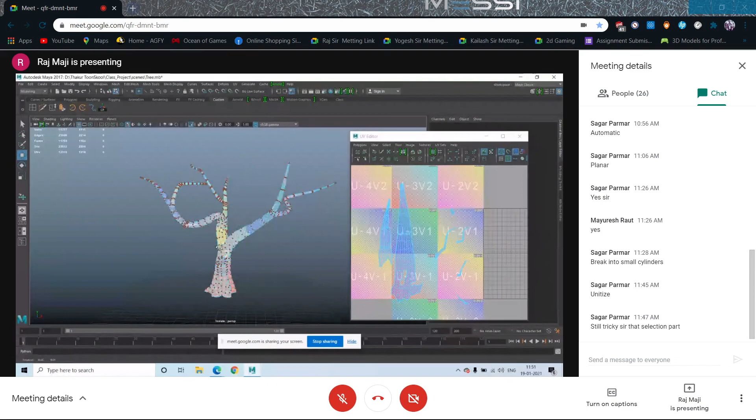Okay, so this part is also done. You can see this part and this part is almost done. Similarly, I will come to the rest and use the same process basically. I will come to the individual shapes: first unitize, select the seam, deselect the seam, deselect rest of the parts, then move and sew, and then unfold.

Okay, I guess you got the point. So any cylindrical object which is very complicated - suppose by extrusion and with the curve you have created a cable, a twisted cable going here and there, you have created an interior scene, suppose - how to unwrap it? This is the process to unwrap it. All of you understood, guys?

Okay, selection - still you are feeling a little bit tricky. The selection part, let me show you once again then. This time, let's take this object. Vision: always you should move forward from bigger to smaller.

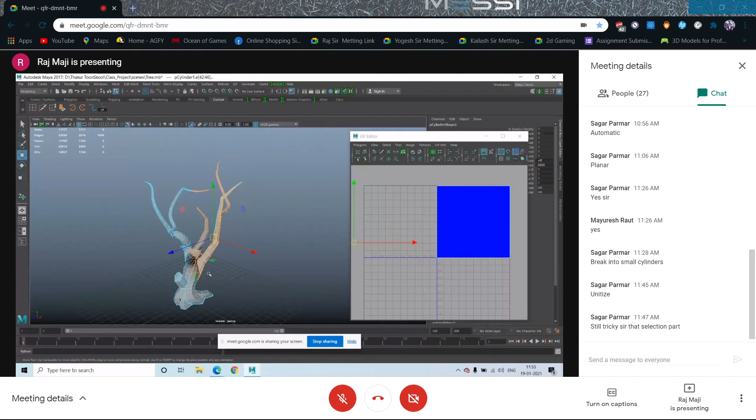Okay, so first of all, unitize, unitize, and then you should select the seam. I'm selecting a seam like this till the end, and as I did previously, select a few more till the end. All right, and then shift select that area so that the seam is deselected. I think so. Seam is deselected, right?

Now deselect this. Okay, only this much is selected. No, definitely these are all separate. I want to move and sew. Beautiful. You can see so clean it is looking.

Now next job will be select, unfold, unfold, unfold. So only one time I have given the unfold, but not again. So that is the outer edge. Not going to disturb it.

Sir, after selection, what did you do? Unfold, unfold by selecting move and sew. After selection, I did move and sew, and then unfold. Definitely, until you are doing move and sew, the faces will not be connected together, no. So the basic concept is mainly in this.

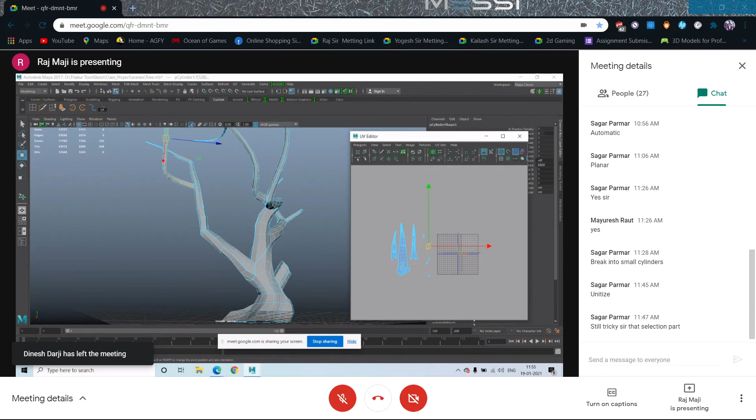Okay, so all the faces and UVs are jumbled up. I want to unfold each face, so for that I am unitizing it. Now I need to stitch it back, so I need to select those edges so that I can stitch it, and that is the reason the selection is needed. I just selected it and move and sew. That's what I did. Okay sir, I thought mapping - no, no, no, not through mapping. I didn't use any mapping.